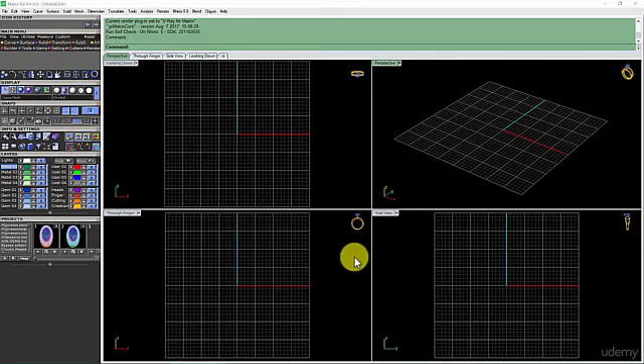Today we will make a very simple pendant with a round stone and some halo around it. We will also make another video later on showing how to make it with a marquise cut.

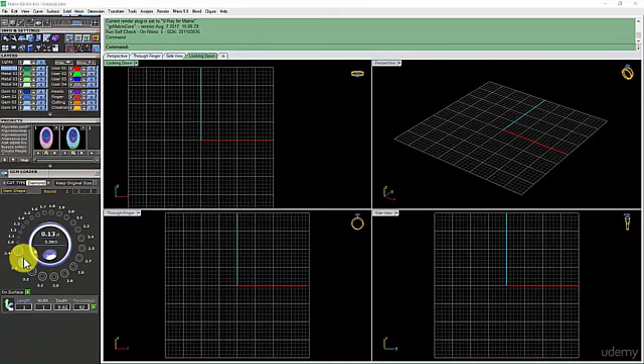Anyway, the central stone is gonna be, let's make it around 1 carat. Let's make a bezel.

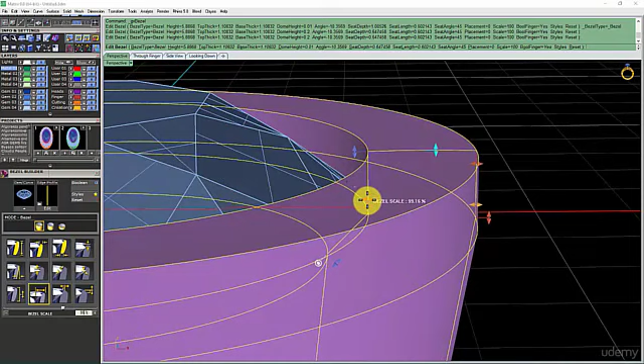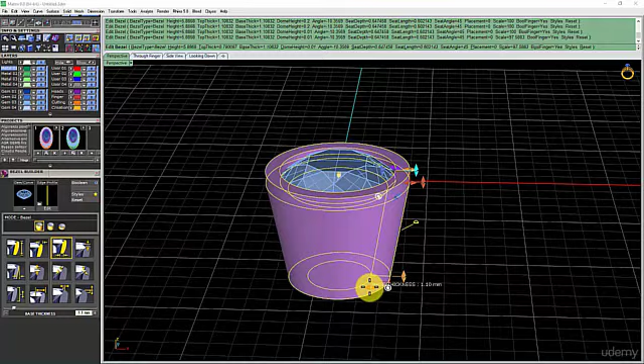Remember how I make the bezels? I usually make it flat on the top, slightly in, 0.7 here, that's alright. A bit tapered here for what we're doing today, and at least 1 mil, 1.10. It always depends, as I always say, on who is gonna clean it up and which type of jewelry you're gonna make it.

Some setters might not like it, so I always recommend to ask how they want it, and then you do it according to how they need it.

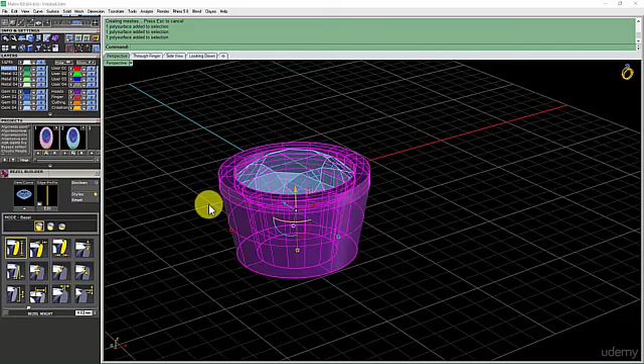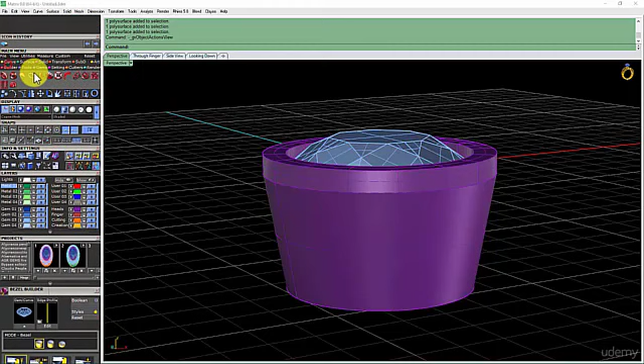What else? Now we need a line around the bezel, but if we select the bezel and press F6, we will not find extract isocurve. That's because matrix works like that. So basically we need to go to curve, and here, extract isocurve. Select surface, select around here, it's fine.

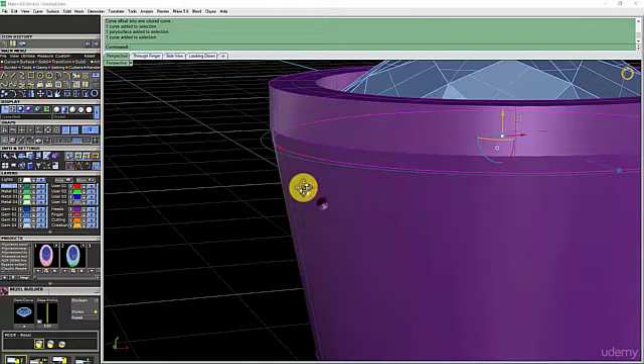But then we're gonna make a little offset, just 0.2, because we want a little flat in there. We can already make the surface, so we can just get a line from the quadrant and make sweep 2 rails, or you could also make a loft in this case.

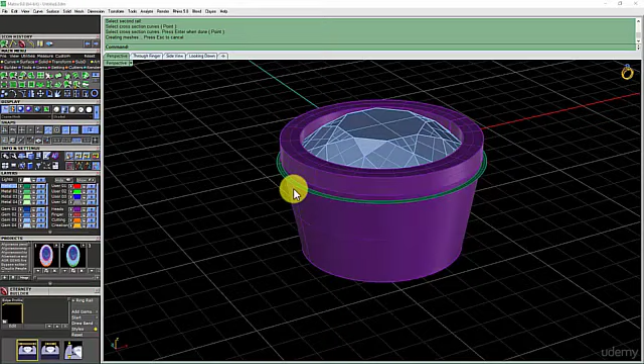Then we get this line, and we're gonna make an offset. This time it's gonna be much bigger, let's say 1.8. Yeah, that's fine. And we just have to move it down.

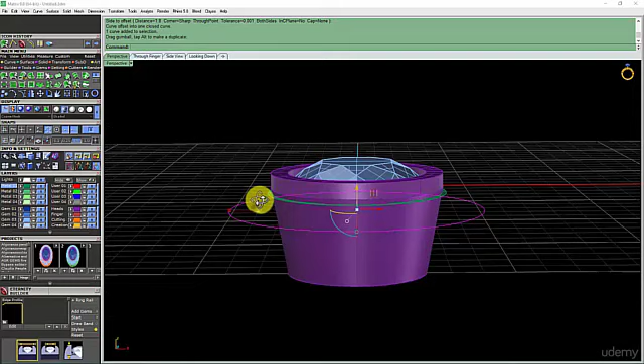Remember, you don't have these arrows because you don't have the MSR. If you're running on Matrix 7.5, you might not have that.

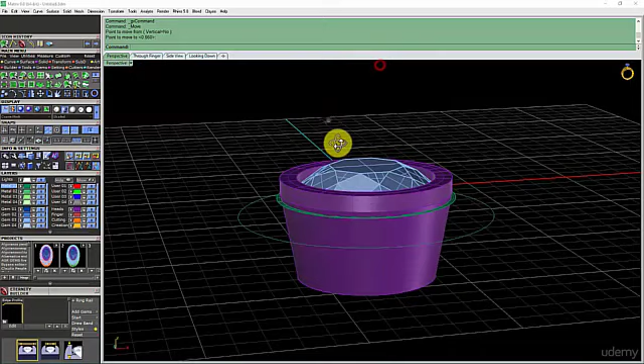We just need to move it from the side view, just move it 0.5 millimeter down, something like that. Doesn't need to be exactly like this. And then we're gonna make another line like that, and again sweep two rails.

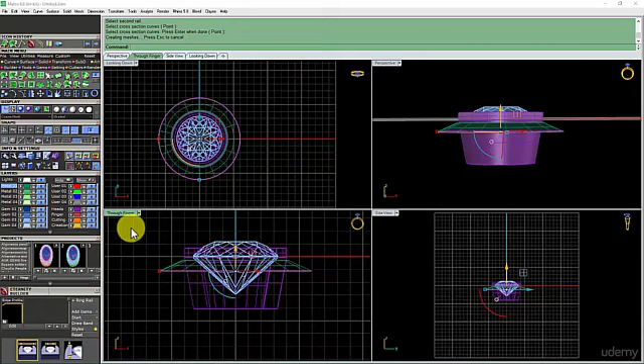Okay, and then this line, it's gonna be aligned to this line, to the bottom of the bezel. How can I move it exactly to that point? Good question. If I just move it, well, first of all, make sure your history is off.

But if I just move it like that, you see, it's quite difficult. If you check the top view, the looking down view, it's quite difficult to make sure it goes exactly to that point. How can you do it exactly?

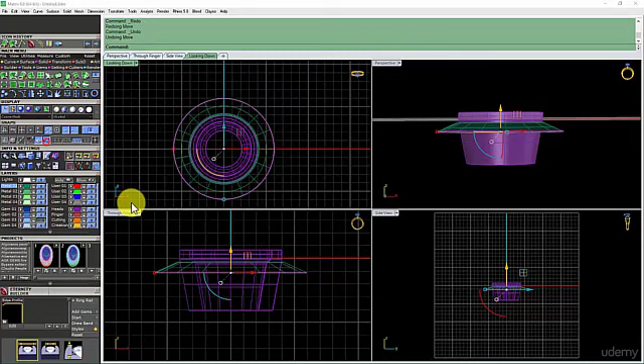Just by checking these two options here, these two buttons. And now if I do it again from the front view or side view, it goes exactly underneath. Then what else?

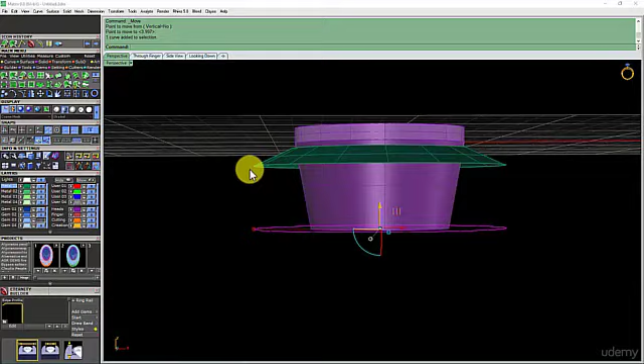This is exactly the same width as the top. I'm gonna make it slightly in, so that when I do surface, it's slightly tapered, not much, just to make it look a bit better.

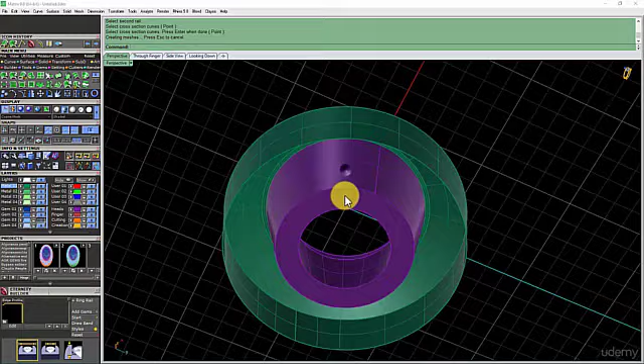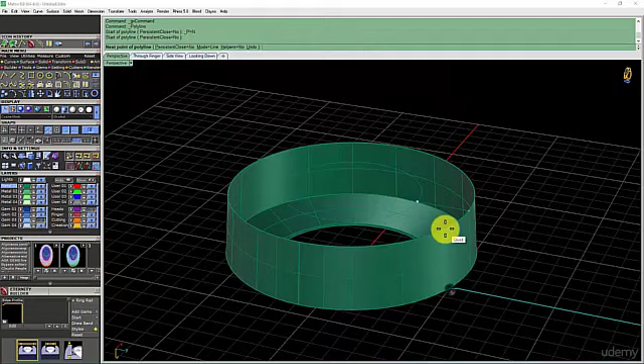That's looking good. Then we're gonna duplicate the edge, so curve, duplicate edge here, or you can just type it, duplicate edge. Here we have another line here, and again we will just make a line from quadrant to quadrant, and we will make a surface.

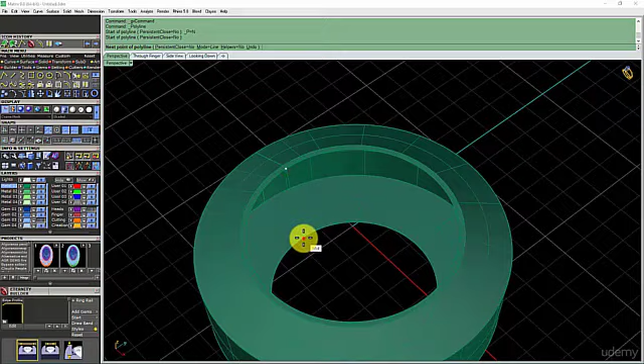You see this? Well, hang on, let me finish this. Now I'm going to close it, from the quadrant to here. So, 1, 2, cross section curve, and I'm going to join it.

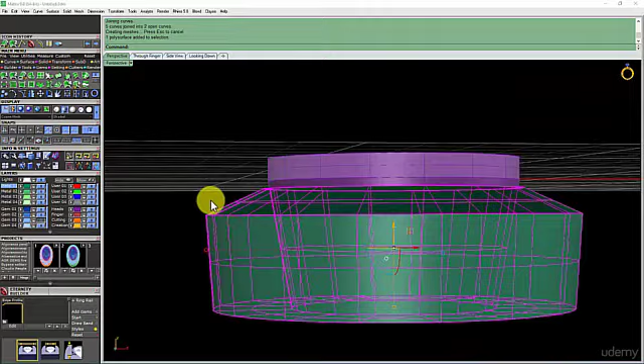This is basically because I wanted to avoid having a sharp edge. You could actually also make a little flat here, but it's not really worth it. If it was more tapered, I would probably make a little flat here, but it's just a little tiny bit, so it's fine.

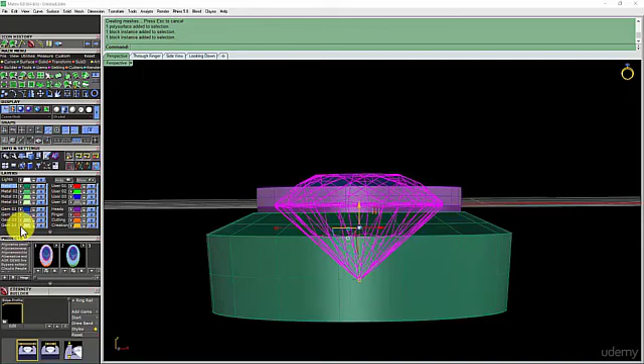Let me put this into the... I usually do the bigger stones on Gem01, and then I keep decreasing. So the smaller stones would be Gem04, but that's really kind of up to you.

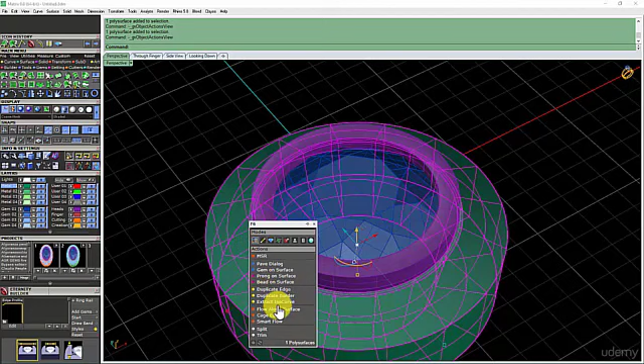What else? Let's put stones on the sides. So we select this, F6, Extract Isocurve. Now we can find Extract Isocurve because it's not a bezel. With the bezel, we can't see it, but with an object, we can. Don't really ask me why, it's Gemvision policy or whatever it is.

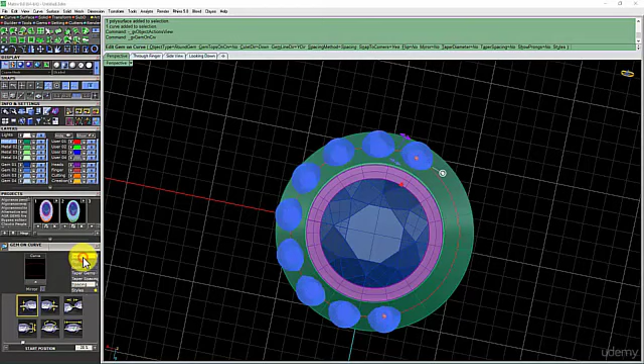Then we have this line, then F6 and Jewellery. By default, it's going to be like that because F4 is activated. If I just click twice, object will be on, and then as you can see on the command line, select surface. So now it's properly aligned.

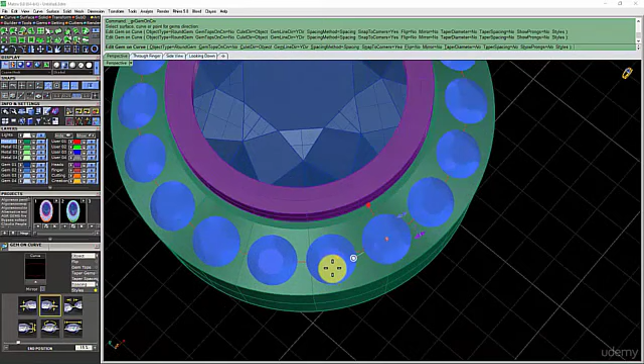Just need to figure out which size is going to fit better. 1.5 should be fine here. Just drag the point, either the start or the end position, to the end.

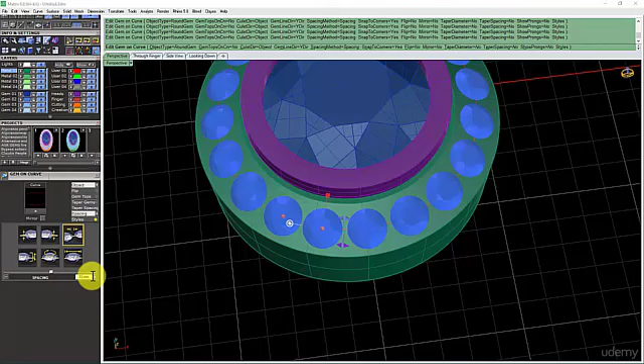And then also by default, matrix will set the spacing at 0.2. The way I see it, it's a bit too big, so I'm gonna set it. You can actually drag the arrows or type it in here. I usually do 0.13 or 0.15.